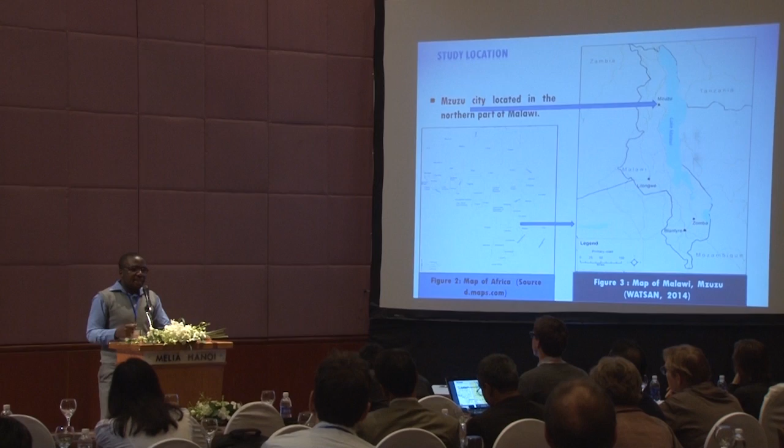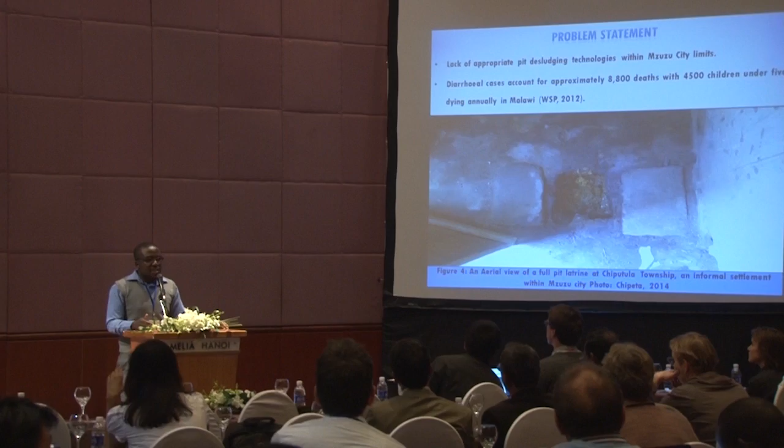The major challenge experienced in Mzuzu City is lack of appropriate pit desludging technologies. In Mzuzu City, there are vacuum tankers run by the municipal authorities, but also by private authorities. These vacuum tankers mainly patronize the planned areas and empty septic tanks. The only option left for those using pit latrines is either to dig a new pit latrine, facing space constraints, or rely on informal pit emptiers - manual pit emptiers - which can be associated with a lot of health risks for the emptiers and also safety issues themselves.

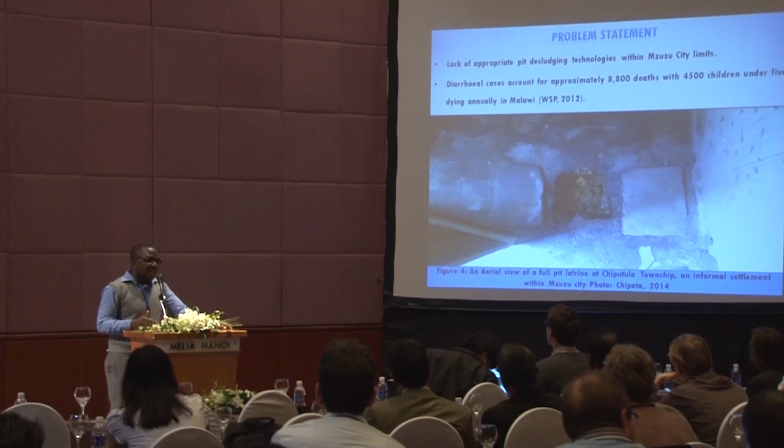Here is a picture from one of the informal settlements, Chiputula, just to highlight an aerial pictorial view of a full pit latrine, which we try to alleviate by suggesting physical technologies that are relevant and contextual to Mzuzu City.

Just a bit of background. The main criteria focused upon for the technology is that we thought of developing a technology that is low cost, effective, safe, and sustainable. Within these parameters, when we did the literature research, we focused upon modification of the treadle pump. These are pumps normally used for irrigation, and they depend on suction power to empty, using treadles that manipulate a rope surrounded by a pulley.

They use piston strokes that move up and down. The upward stroke sucks up the sludge in this case, and the downward stroke pushes the sludge so that it can move to the discharge pipe. From this conceptual setting, we now adapted the technology with the support of other consultants, especially our friends from irrigation, on how we can adapt the technology to address pit emptying issues.

On the other part is the sketch diagram of the pit pump, which is the conceptual setting. What we did is replace the rope with a bicycle chain, and also put pedals instead of the normal treadles that are there, so that we can see if this can also be used as another technology for pit emptying.

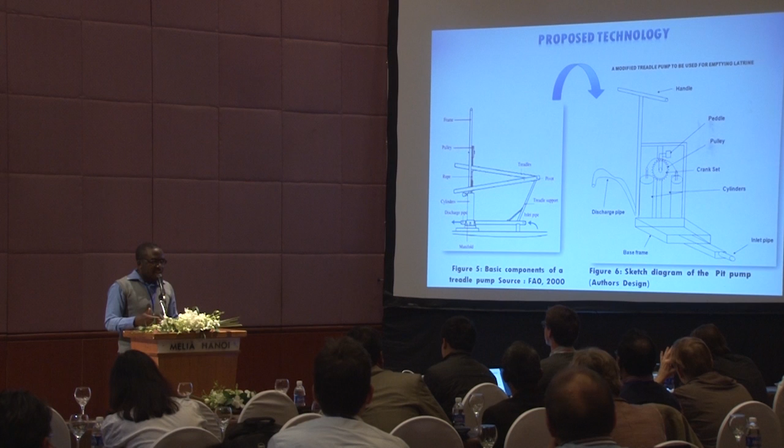Discussion on the changes that we have made regarding the pros and cons of the technologies are as follows.

Firstly, we believe that the technology can potentially be low cost and sustainable because all the materials being used are found available locally, whether it is the chain parts or the other nuts and bolts, available in many shops in the developing country context.

We also believe that it can be potentially easy to operate because it can be almost like using a bike, so that it is literally something that people can easily adopt and use.

On the safety part, we are looking at the possibility that because it's a treadle pump, you can just insert a hose into the sanitation hole and cycle outside the pit latrine. This can be helpful, especially in pit latrines that are weak, since sometimes when you try to empty from inside the pit, it can potentially collapse because of the weakening of the surrounding pit.

Finally, we thought that for this technology, the major advantage can be that pumping with leg muscles can be potentially more useful and less straining than using upper body strength.

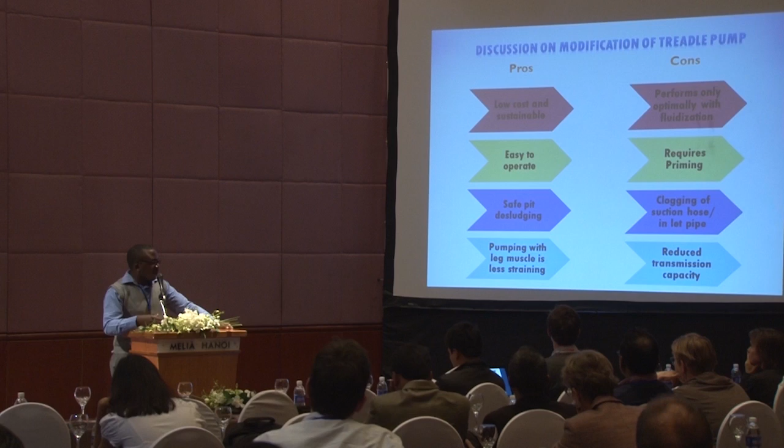We also envision, since we have seen from other presentations that there is a lot of trash in pit latrines, that many things can possibly enter the suction hose, causing clogging. So this has to be tackled, possibly with a strainer or a filter, to help reduce the issues.

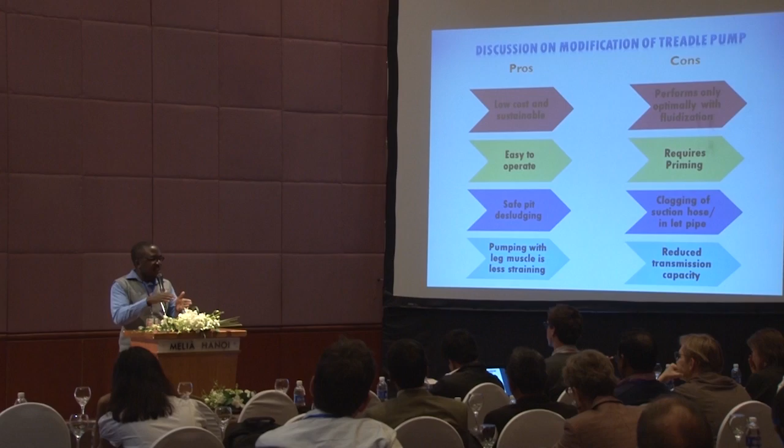We are also looking at the issue of reduced transmission capacity. This concerns the material itself that we are pumping out. As it moves through the suction hose, material such as sludge can possibly build up inside the hose, reducing the actual working flow and the flow that can pass through it.

Armed with that conceptual design, and trying to test out the concept further, we gathered the materials, showing the fabrication cycle. We went to some local welders to show them the design, which in the first instance did not work, but we had to make modifications on site, brainstorming on the feet, and test it on some light mud slurry to see what was happening. This was seen as an opportunity for reviewing the design in further phases.

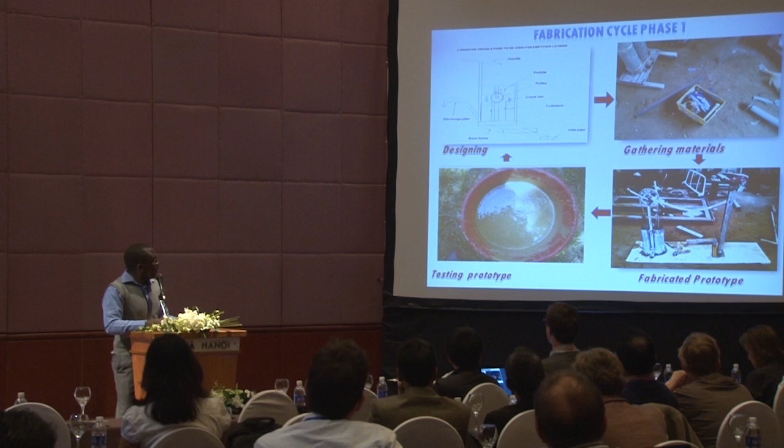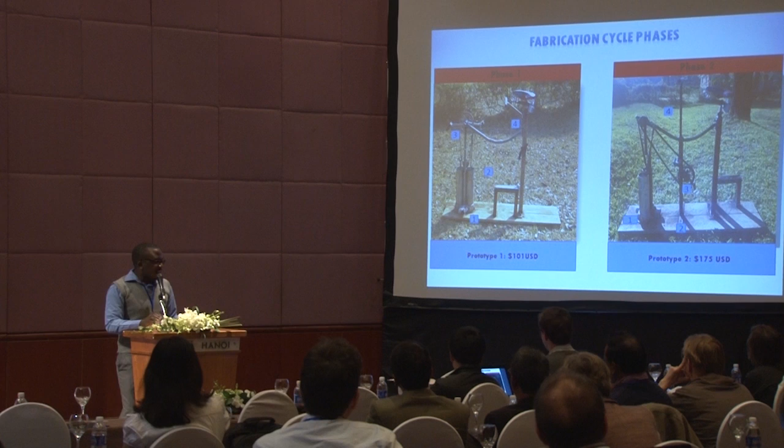In phase 1, we were only able to do the half cycle motion, which was a bit straining. In the second phase, we are trying to accommodate a full cycle motion, which we believe can be more useful and easier to operate. The fourth change is the changing of the handle positions.

Now we just highlight the video on what we did and what was observed.

The background voice is just someone trying to signal to me.

From this video, you can see that the process of doing the full cycle motion is still in progress. As we are trying to manipulate it, we feel that even the flow rate was still negligible, because when we tried to cycle, it was able to suck some of the mass slowly, but some of the mud was just settling in the suction hose, and there was also potential backflow because we had not added a non-return valve in the suction hose.

In the next phase, what we are trying to do is optimize the pump design, looking at the efficiency, the energy requirements, and the economics, so that we can potentially have a design that works. This can potentially be done by December 2015, which is our deadline.

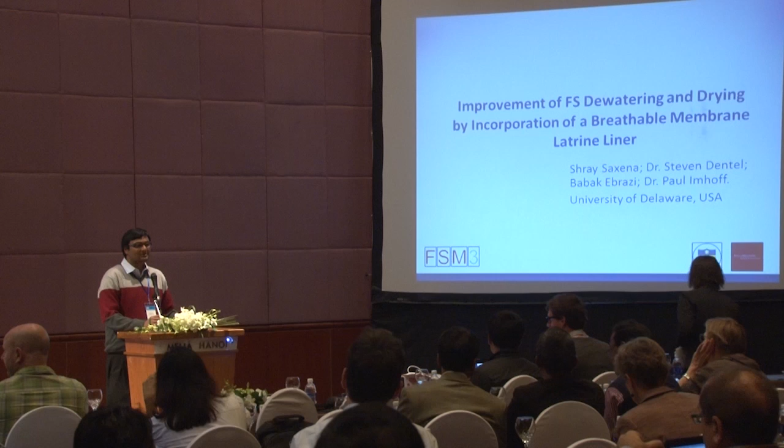Thank you for that introduction. Good morning. I want to talk about my project on improvement of fecal sludge dewatering and drying by incorporation of breathable membrane latrine liners. I would like to point out a few statistics from the Indian sanitation problem, and I'm doing this because we plan to test these breathable membranes in due time in India.

We have about 638 million people with no access to toilets in India - about 59% of the total world population who still practice open defecation live in India. We have 40% of the urban population in India not having access to improved sanitation facilities, and of course more cell phones than the number of toilets, as has been pointed out throughout the conference. Going through these statistics, I feel that my solution to open defecation in India is basically a matter of space, money, and attitude change in people. I hope to address the space and money aspects through this project of ours.

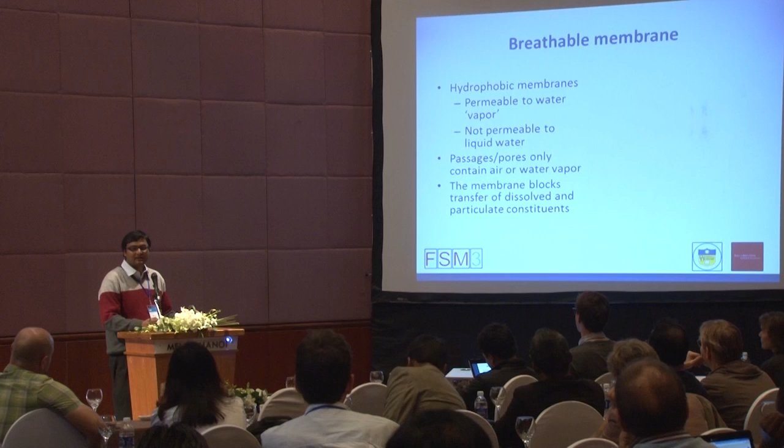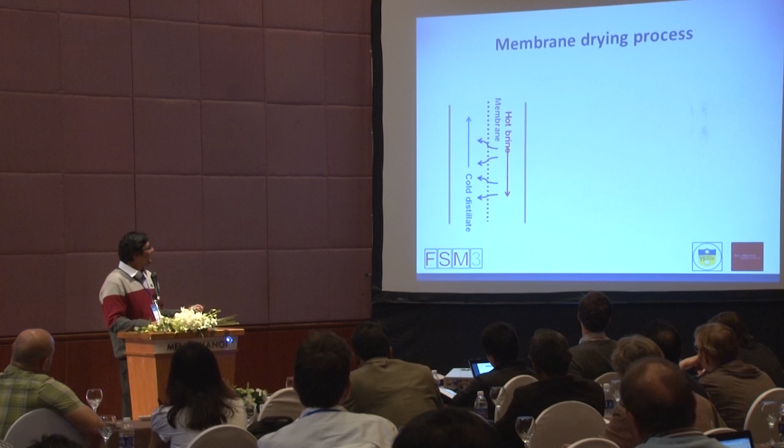To describe our process, I'd like to go through the membrane distillation process first. It is extensively used in desalination processes around the world. We have the membrane in between, with hot brine solution on one side and cold distillate solution on the other. Due to the partial pressure gradient or temperature gradient, there is a gradual flow of water vapor from the hot brine to the cold distillate, resulting in a concentrated salt solution and a dry solution on one side.

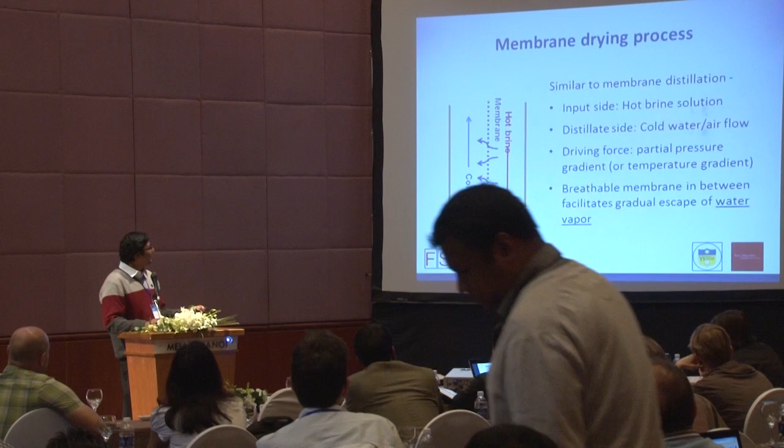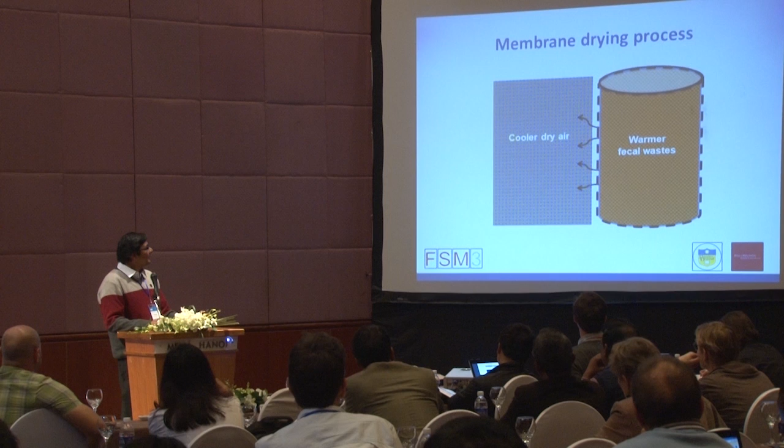To apply this to our context in management of fecal sludge, you can imagine a 55-gallon drum lined with this breathable membrane, containing warmer fecal waste, with cold dry air on the other side. As the process indicates, there would be a gradual flow of water vapor through the breathable membrane, giving you dry fecal matter on one side and pure water on the other.

In terms of field application, we would be testing this membrane system in India, starting our field testing in Kanpur, in two families, in two locations, two slum areas.

So it's a simple process. You have a squatting toilet, and you attach a perforated drum containing this membrane liner. As you would expect, with the cool dry air on the outside, you get drying of fecal sludge as it gets collected during the treatment.

Now to get to the sciencey part of it, this is what I've been doing for the past 2 years, basically working on trying to describe this process a little better. We now know that this is the equation that governs the flow of water vapor, based on the stagnant film model that everyone wants to look up.

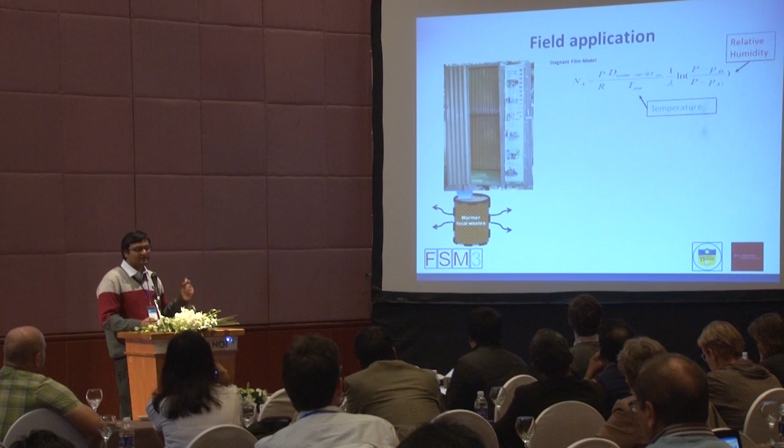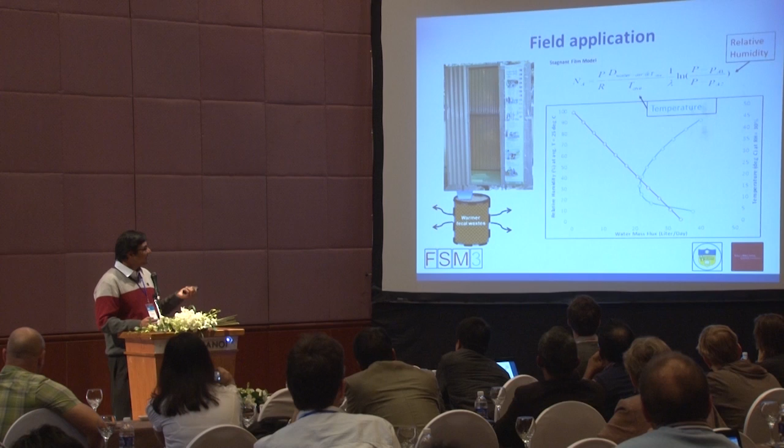As you can expect, there are two major parts that govern this equation: the relative humidity on the outside and the average temperature across the membrane. To give you an idea of how these two variables affect it, this is a simple graph which points out that as the relative humidity decreases, you would have an increase in the water mass flux, and essentially a higher drying rate when you have a higher temperature or an extremely low relative humidity.

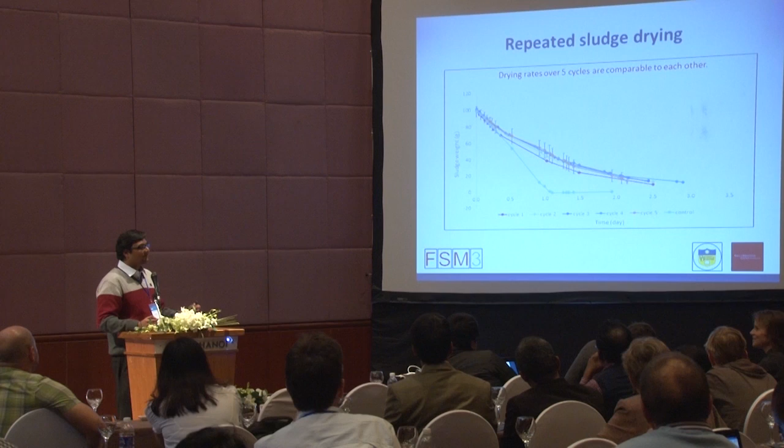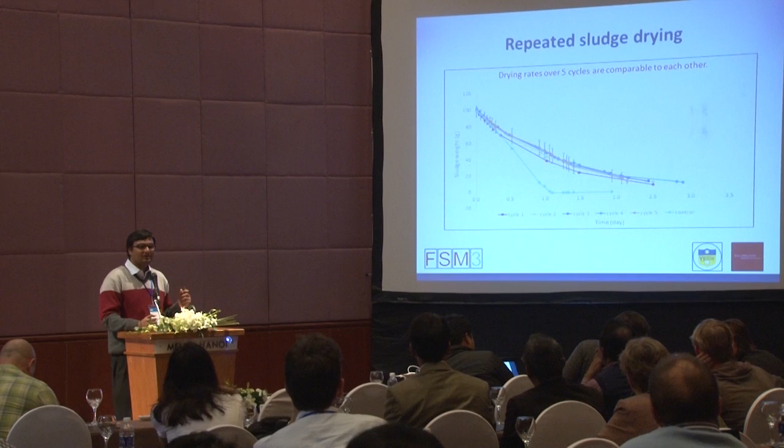We tested this on a small scale system in our labs, and we've done this a few times. This is a 5-cycle test where we tested one simple membrane with fecal sludge over 5 cycles. As you can see, the drying rates or drying characteristics are very similar to each other. Over a period of 5 cycles, we did not see much change or loss in performance.

We did some additional testing which showed us that there is no significant deposition on the fabric when there is complete drying. The top figure also indicates how it forms a thin wafer-like layer on top of the membrane, so it does not stick on the membrane. But this particular test was a digested sludge test, while with fecal tests, we found it was easy enough for the deposits to be washed off rather than forming this layer.

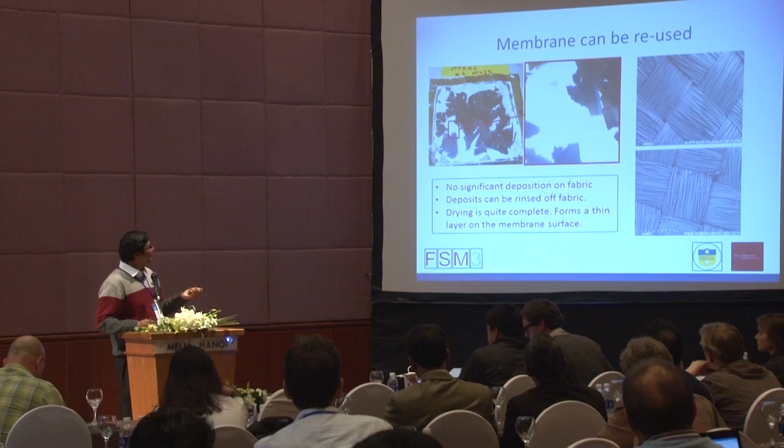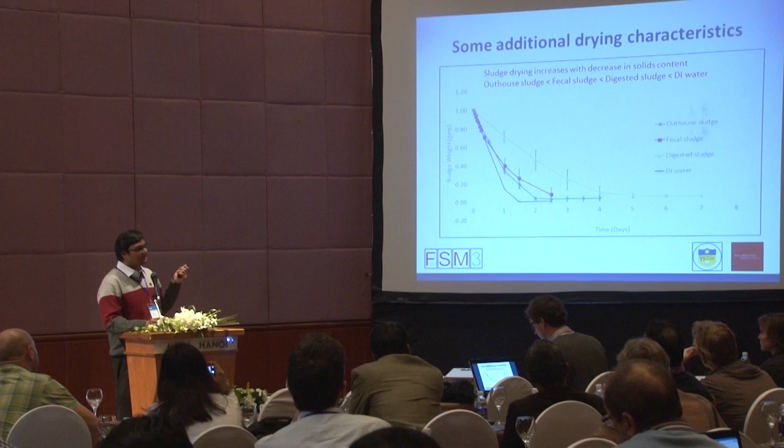A few other characteristics we found out: in this graph we tested four different kinds of sludge across the membrane, and we saw that sludge drying increases as the water content or solids content decreases. In that order you have outhouse sludge, fecal sludge, digested sludge, and then plain clear water. As you can see in the graph, the drying rates are faster for DI water every time.

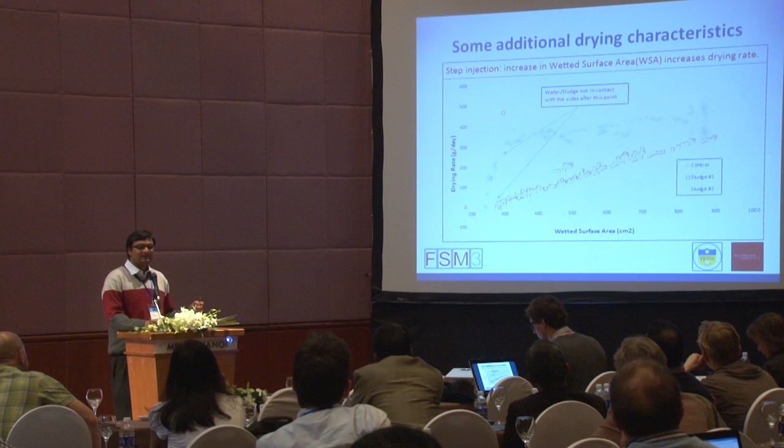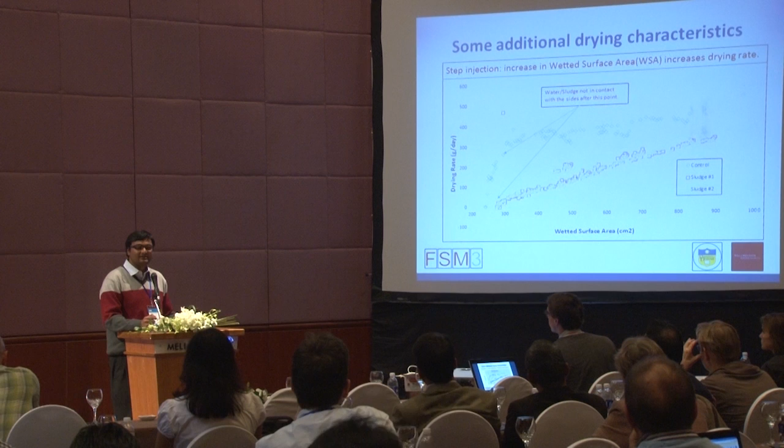We also did some step injection tests, which are more applicable to field application in India. We would have a small amount going in, increasing the wetted surface area which is in contact with the outside air and the sludge as well. It was indicated to us that this increase in wetted surface area increases the drying rate, which was a good sign.

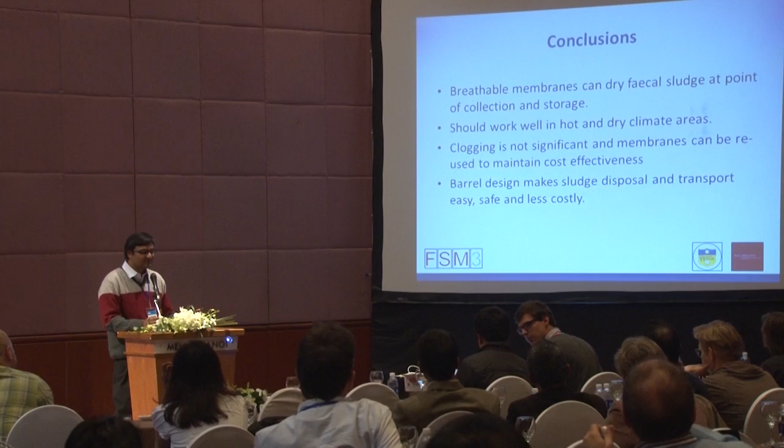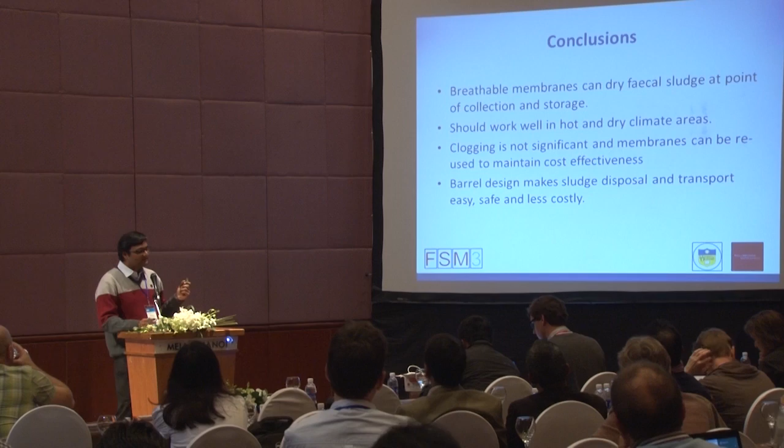In conclusion, I'd point out that breathable membranes can dry fecal sludge at the point of collection and storage, and should work well in hot and dry climate areas. Clogging is not significant enough to affect the process even after 5 cycles, hence it is reusable and cost effective in the long run. The barrel design makes sludge disposal and transport easy, safe, and less costly.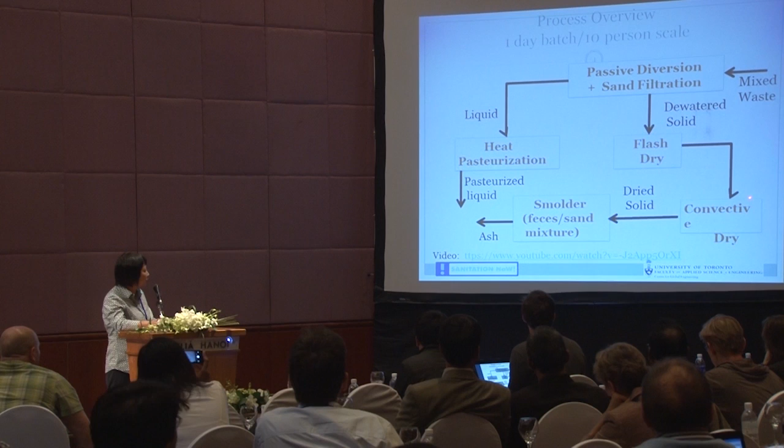The liquid goes into the heat pasteurization tank. The dewatered solid is flash dried and then convectively dried - sorry, the formatting got changed, switched computers. So the solid gets dewatered in one step via diversion and filtration, then it gets dried, and then the dry solid gets smoldered. Essentially, we're drying the solid and burning it.

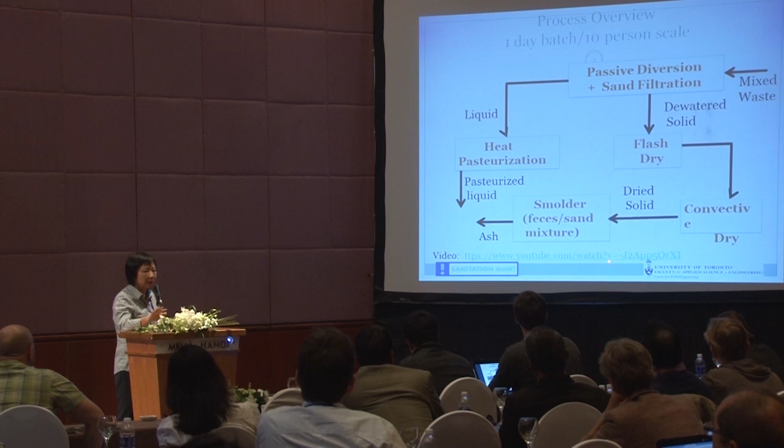It sounds really, really simple - that's it, we just dry and burn. What we get out of the smoldering process is essentially the inorganics of the feces; the feces is completely destroyed. The temperatures in the smoldering reactor get up to 600 Celsius, so pathogens are gone, the solid waste is gone, and the liquid is pasteurized. In the phase 2 process, it spends close to 24 hours in a 70 degree Celsius kill tank.

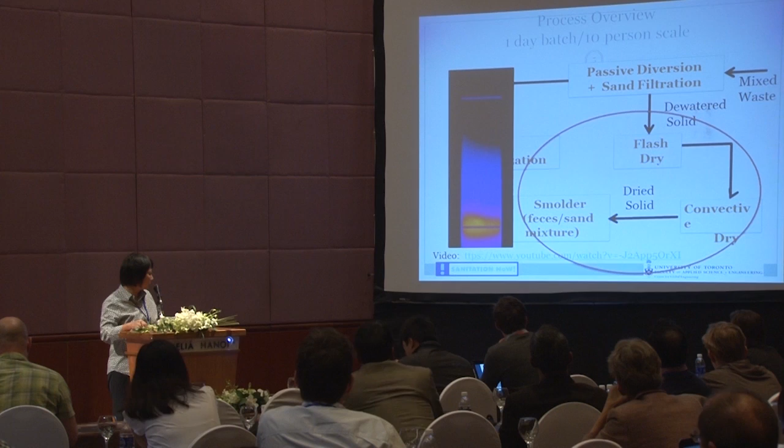So let me talk about the smoldering a little bit more. The saying there is that the smoldering has a feces and sand mixture in there. Smoldering is, for those who haven't heard me talk about this before...

The actual chemical reaction is the same as a fuel reacting with oxygen to form CO2 and water if it goes to completion. But instead of an open flame reaction where the fuel has been volatilized and the reaction with oxygen takes place in the gas phase, a smoldering reaction takes place at the surface of the solid fuel. So oxygen has to get to the surface of the solid fuel and then reacts on the surface.

So the difference between that and an open flame is that it's a more controllable process. It's a slower process, but you have to provide porosity so that oxygen can get to the surface of the fuel.

Feces is a soft, compressible material, so if you have a pile of that, you're not going to get air to the surface of the fuel very well. So we mix the fuel with sand, and the structure of the sand provides the porosity so that oxygen can get to the surface of the fecal mass. That's why we have a feces and sand mixture.

Working with sand is a pain in the neck, but we take advantage of this particular feature as well, which I'll talk about in a little while.

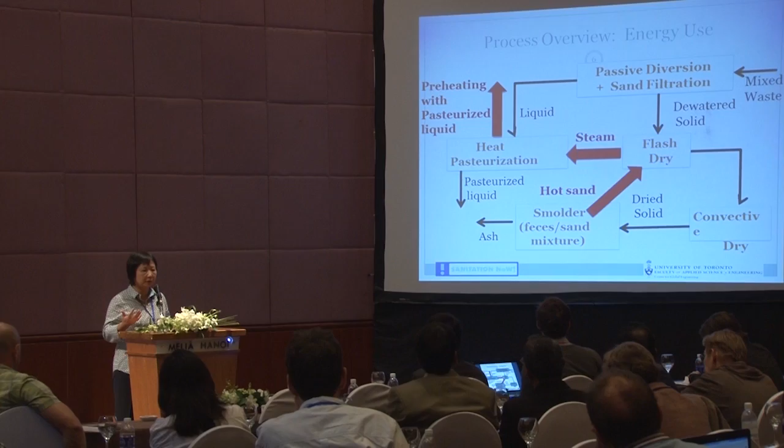It happens in a few minutes. So the advantage of that, in addition to being able to dry very quickly, is that we generate steam very, very quickly — in just a few minutes.

So we can then direct that steam into the heat pasteurization tank, and through condensing coils, condense that steam and use that enthalpy of condensation to heat up the contents of the liquid tank. Then, at the end of the one-day cycle, the liquid in the pasteurization tank is still somewhat warm, so we run it through a counter-current heat exchanger to preheat the liquid going into the tank.

So the energy management aspect of what we're doing: we store the heat generated using the hot sand as a thermal battery, and we use that heat once to flash dry the feces, a second time to heat up the liquid to pasteurize it, and a third time to preheat the liquid going into the tank.

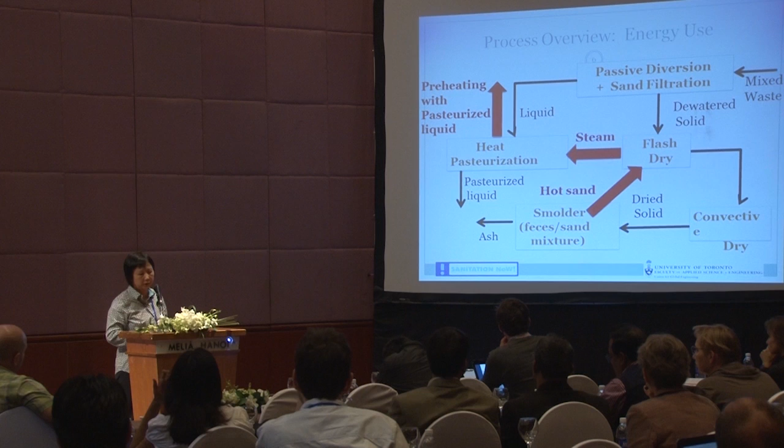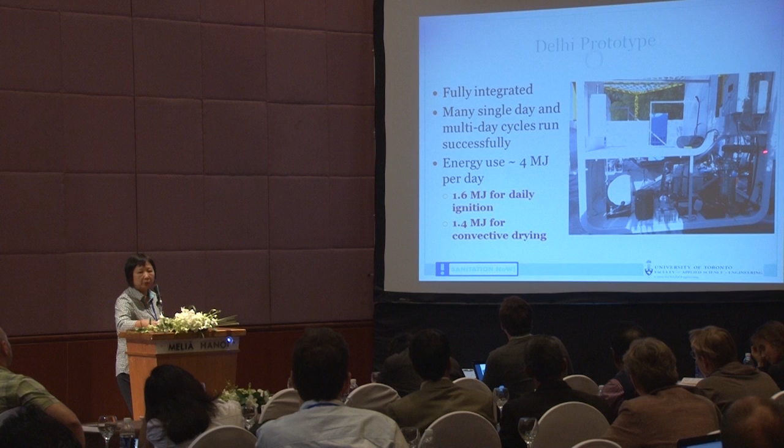So this is what we showed in Delhi, and those of you who saw it, it was a beautiful thing, and it was a little big, I'll admit that. But it was a snapshot in time in terms of our design iterations. What we're very proud of was that it was actually a fully integrated system, and we had run it multiple times, multiple days, either single-day cycles or multiple-day cycles, and run it very successfully.

There are a few things that we didn't like on those two days, and obviously at this size it would be kind of expensive. But we also didn't like the amount of energy we used, 4 megajoules per day. We did a very careful analysis of where all the energy costs came from.

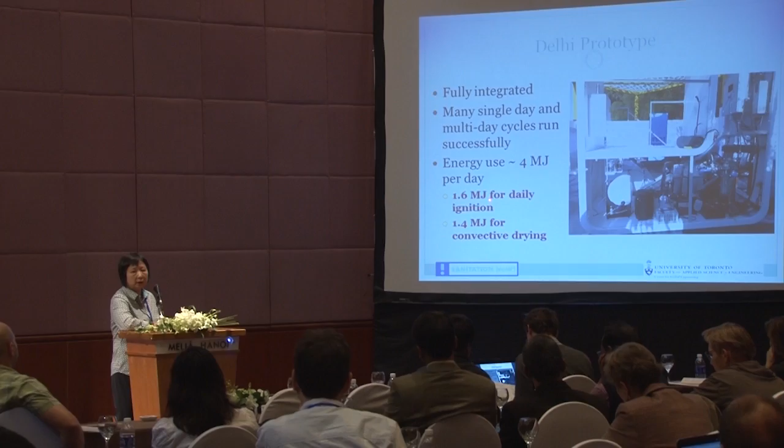The two biggest energy cost items were the daily ignition - to get the smoldering process going, you have to ignite the fuel at the bottom, and it took 1.6 megajoules for that every day - and the second was 1.4 megajoules for convective drying.

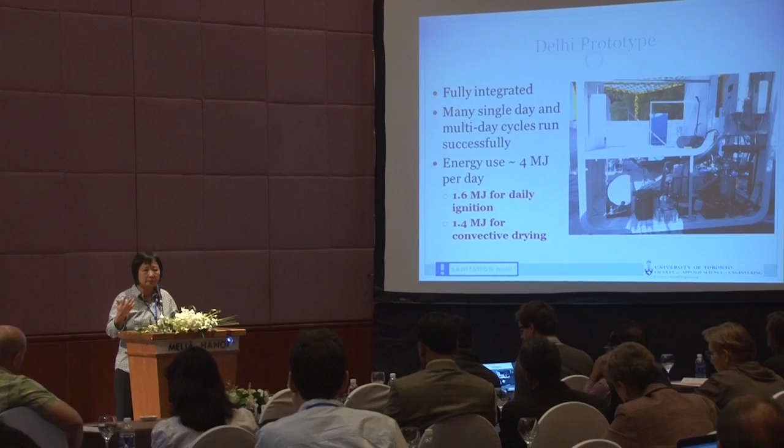Even though this flash drying worked really well, we didn't get the feces dry enough to the point where it would smolder. So we would pump air through this mixture in order to finish drying. This turned out, in hindsight, to be a really stupid thing to do - it's very inefficient and costs a lot of energy. I won't go into all the reasons why, but that's why.

So the lessons we learned from all that at the end of phase 2 - there are many things, but I'll just highlight the ones in red. We like the fact that we use sand as a thermal battery, and we were able to make use of heat generated in a very efficient way.

We like the process of flash drying because it was so fast. The things we didn't like: the energy we had to spend to ignite the fuel every day, and we didn't like convective drying - not just because of the energy cost, but because if we're bringing air from the ambient to dry the fuel, that process becomes very dependent on ambient conditions. Under high relative humidity, that process becomes even slower. So we want to remove convective drying in the next step of our process.

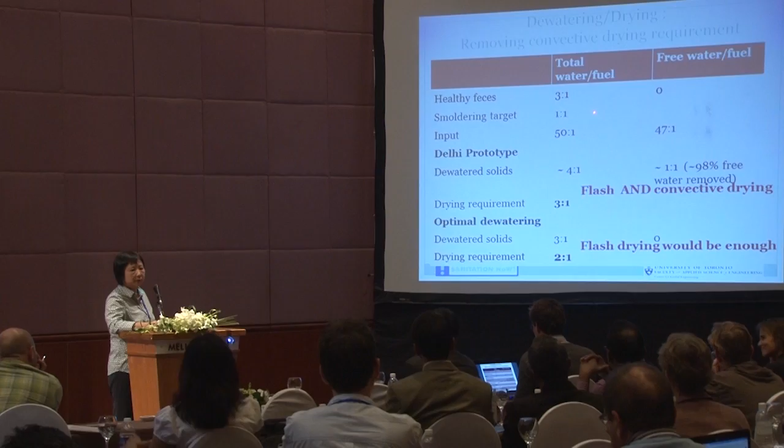So just to say a little more about the drying and dewatering aspect. Healthy feces is about 3 to 1 water, 75% moisture content. Our smoldering target - if we can get it down to 1 to 1, we could burn it very robustly. We could also do it at 60%, which is about 1.5 to 1. But 1 to 1 is a robust number.

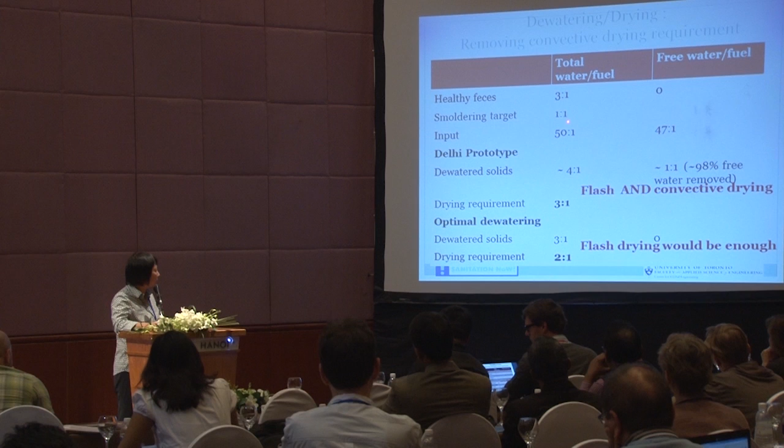The input we had, the mixed waste of solid and liquid going into the process, was about 50 to 1. Of that, 3 to 1 was water and feces, so 47 to 1 was the free water. The process we showed in Delhi was able to de-water this - by the time we de-watered, the water to fuel ratio was 4:1, meaning we had about 1:1 free water remaining after de-watering.

If you compare 47:1 down to 1:1, that's pretty good - we got rid of about 98% of the free water. So comparing those two numbers, that's great. But the energy we had in the hot sand wasn't enough to flash dry this 4:1 down to 1:1.

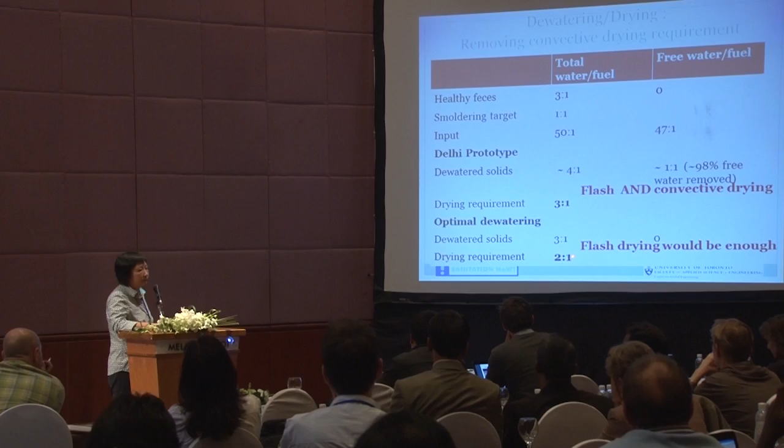But if we were able to remove all of that free water, the water to solids ratio would be about 3:1, and our drying requirement to get down to 1:1 would just be 2:1. At that level, we would have enough energy in the hot sand to flash dry and not have to convective dry.

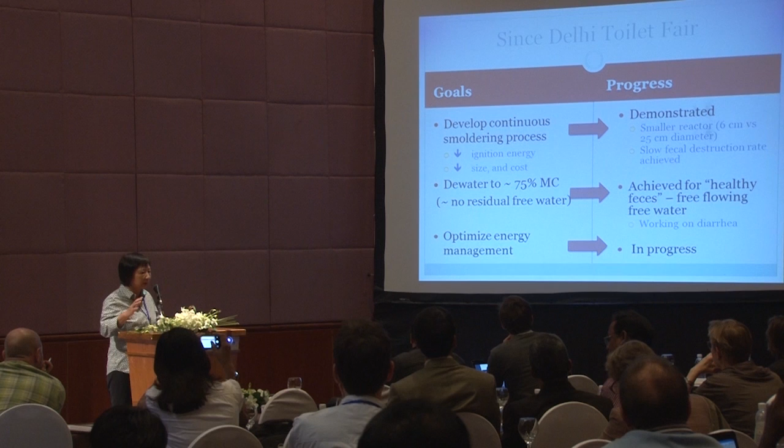Since the Delhi toilet fair - and I can't share all the details with you yet - at a very high level, we have been able to develop a continuous smoldering process. This is one of our big goals, because that would reduce the ignition energy - we wouldn't have to ignite every day - and it would also reduce the size and cost. So we've been able to do this, and we're very happy with this particular progress.

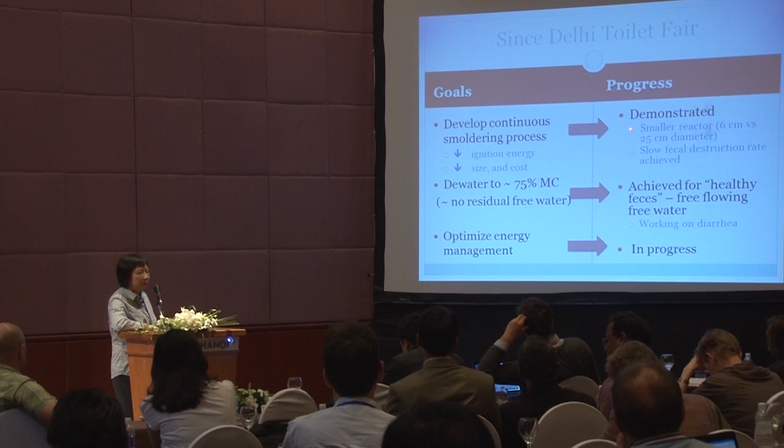And the reactor that we're using now is only a 6 centimeter diameter reactor. We've been able to show if you're going to run this process continuously for a 10-person scale, you're only smoldering, only processing about 30 grams per hour. And imagine trying to keep a continuous burn at that slow of a rate. We've been able to achieve about half of that.

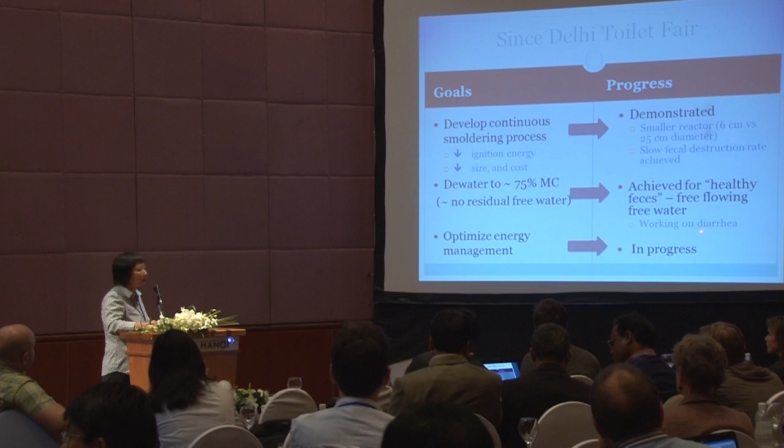We've also been able to dewater down to about 75% moisture content. So we've been able to do this for healthy feces. We're trying to work on what to do with diarrhea. And some changes happen once we move to a continuous process, so there's some tweaking we have to do with the energy management. That's in progress.

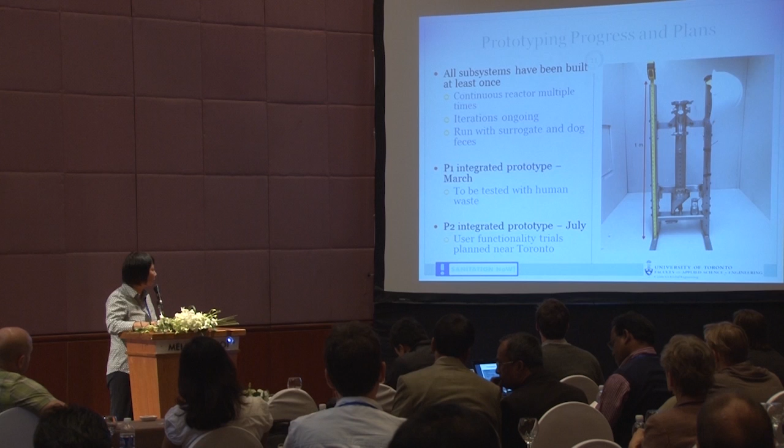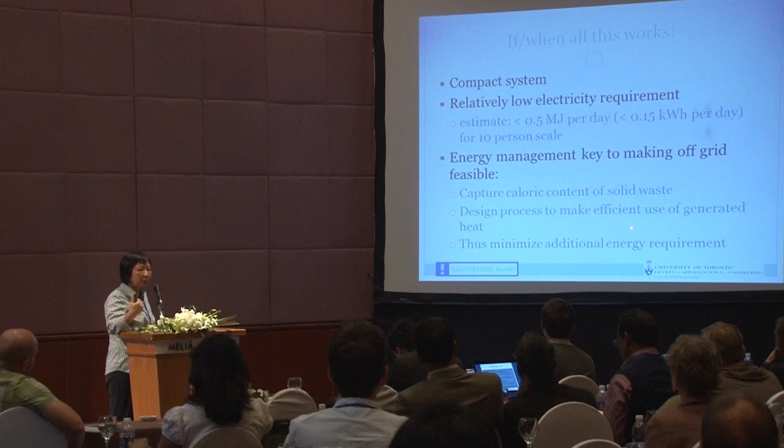So if all this works, the final system, our estimate of the electricity requirement is only about 0.15 kilowatt hours per day. And the key here to make this work out, just to tie it back to the initial point, is in managing the energy efficiently so that the amount of extra energy needed through solar panel or so forth is minimal. So that's the final point I'll make on that. And that's it.